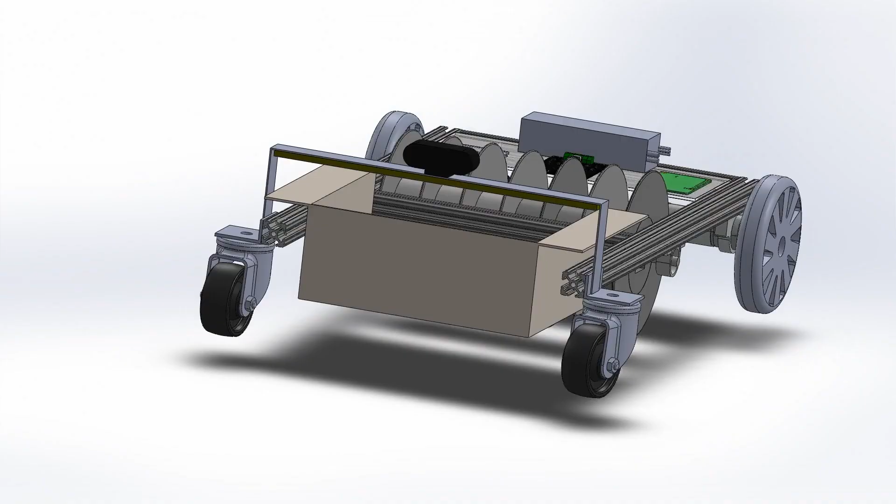What separates this engineering project from what one might accomplish in their garage is detailed CAD modeling and stress analysis. Despite mostly working remote from one another, we were able to collaborate and form well-defined CAD models using SOLIDWORKS. Through this program, we were able to illustrate our ideas to one another and ensure there would not be any unforeseen interferences. We kept updated models throughout the project and shared them with each other in order to expound our ideas.

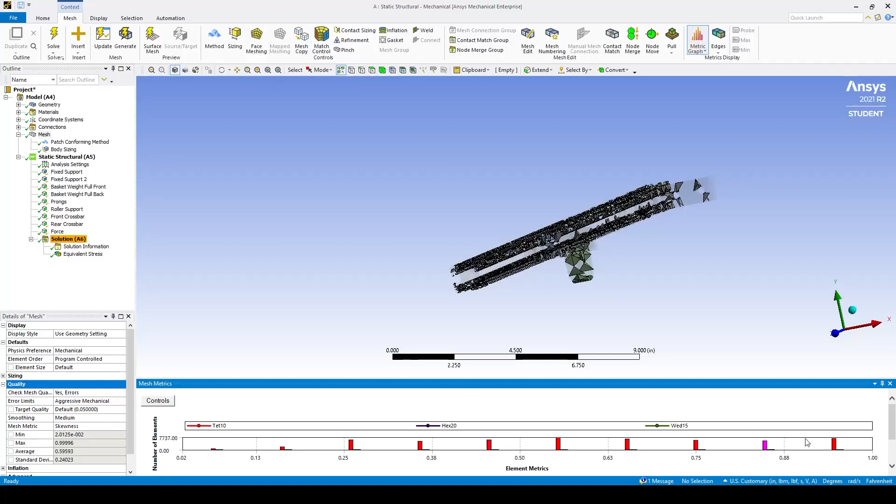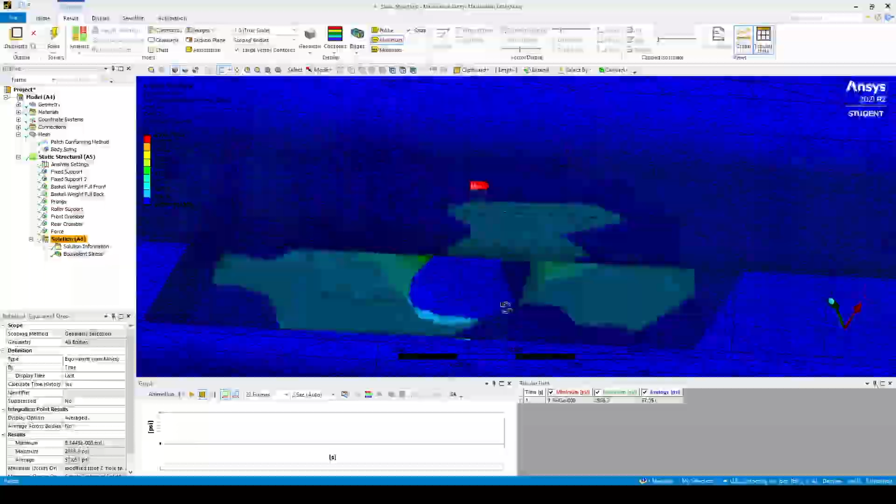Once we felt our CAD model was fully defined, stress analysis was done by creating simplified models and importing them into ANSYS. Unfortunately, our model was too complex for the student version, though this problem was overcome by creating simplified versions which were used just for stress analysis. Once the best trade-off was found through parametric analysis and mesh refinement, a worst-case stress scenario was examined by placing all of the weight on one side of the frame. Even under these conditions, our frame and fasteners passed the static structural test with a minimum factor of safety of 15.

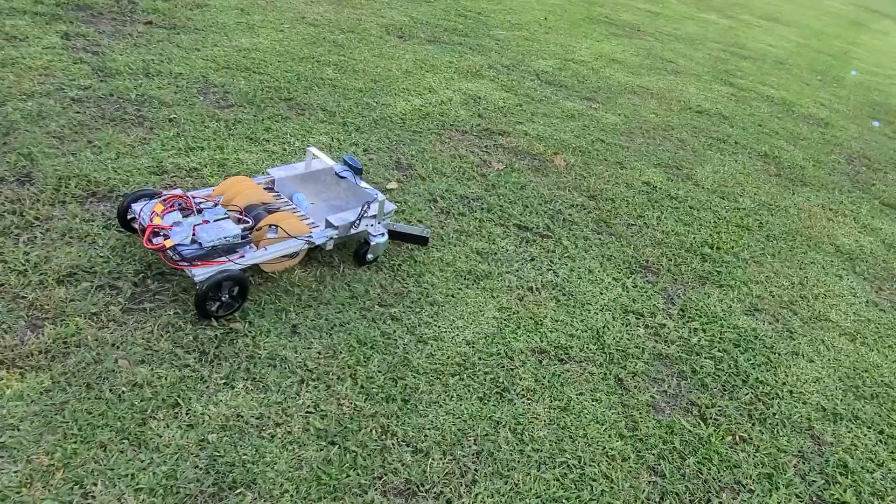Another aspect of the project I worked closely on was terrain traversal and the associated steering. We settled on wheels for terrain traversal as they were cheap, readily available, and easy to work with. Casters were chosen for the driven wheels as the rotation of the robot by the drive wheels would cause stress on the driven wheels if they were unable to rotate on a vertical axis. Differential steering was chosen as this was the simplest form of steering available and the easiest to implement and integrate with the controls.

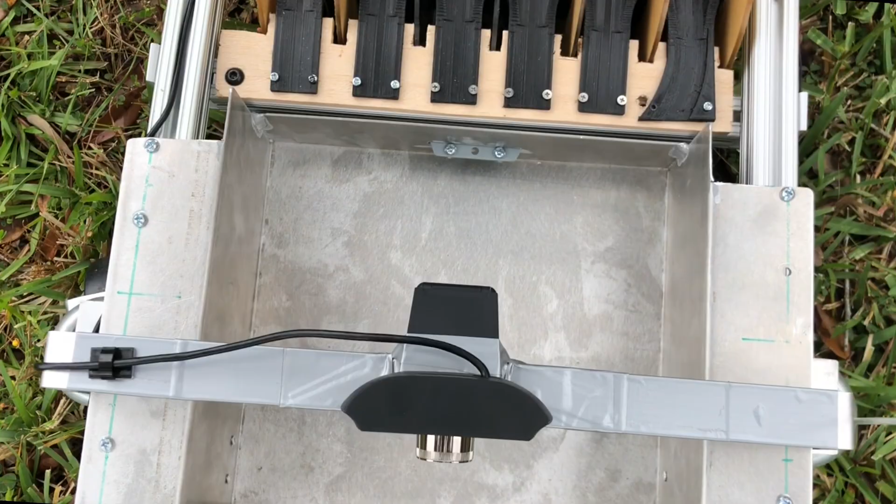Lastly, I worked closely on the cargo release system. The most effective method of release was settled on as dropping the basket containing the cargo, as this contains the least moving parts, as well as allows for easy operation by the user. Instead of collecting loose balls scattered on the floor, the user would just pick up the container off the ground. Our limitation in this respect was the release device available to us was flimsy and would be unable to support the weight of the cargo. We went through several iterations of design before settling on the device simply preventing the container from rolling off the front of the vehicle during normal operation, as this incurs the least possible stress on the release device.

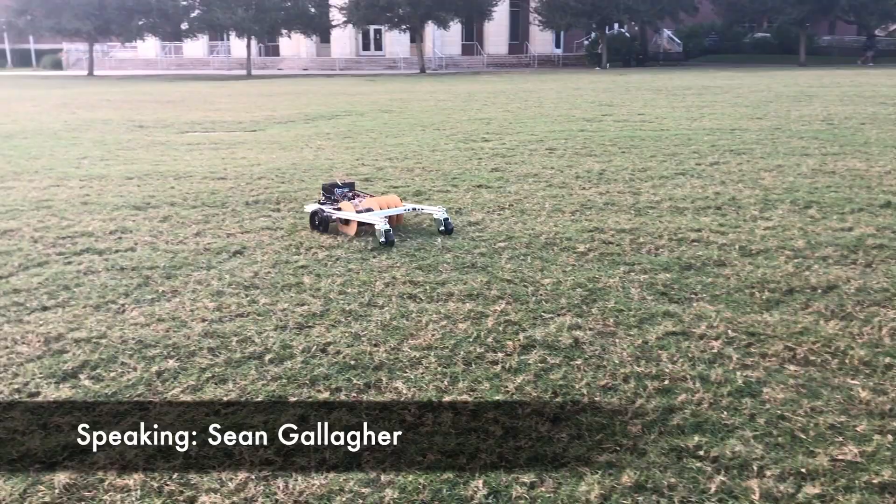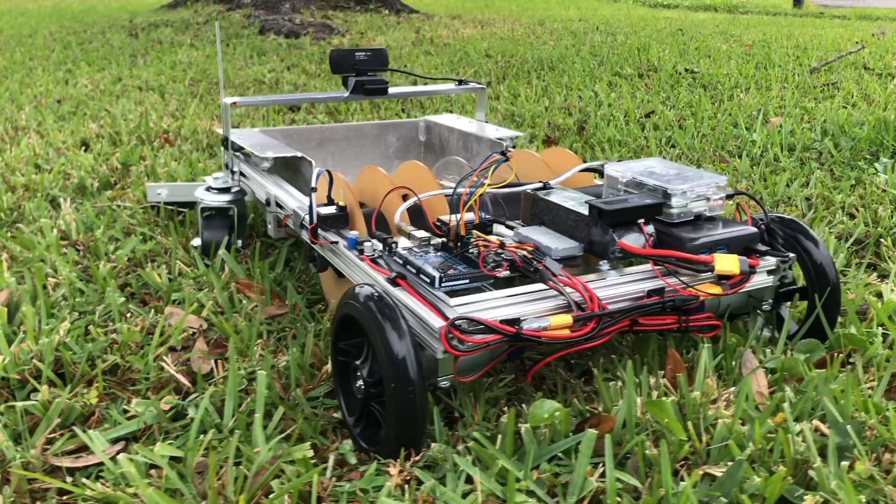The motors used are 12-volt DC brush motors with specs of 300 RPM and 233 ounce-inches of torque. This allowed a 20-pound vehicle to move at roughly 5 feet per second. The motors had an offset shaft that allowed for adjustable wheel height and also included Hall effect encoders. These motors were connected to a Cytron dual motor driver that used PWM input and MOSFET H bridges to control the speed and the direction. The motor driver had a max current limit of 10 amps for each channel.

A 12-volt 3S LiPo battery powered the motor driver and the payload release mechanism. The release mechanism needed a DC to DC buck-down converter to regulate the voltage down to 7 volts. The Raspberry Pi was powered by a 5-volt power bank, and the Arduino Mega was powered by a 9-volt battery. A power switch and battery percentage indicator was added for better usability.

The retrieval mechanism consisted of a laser-cut acrylic disc set that was spaced to capture the golf balls when it was rolled over. The spacer was 3D printed to ensure uniformity and allow for interlocking. The square profile of the disc axle ensured the entire mechanism would rotate as a unit.

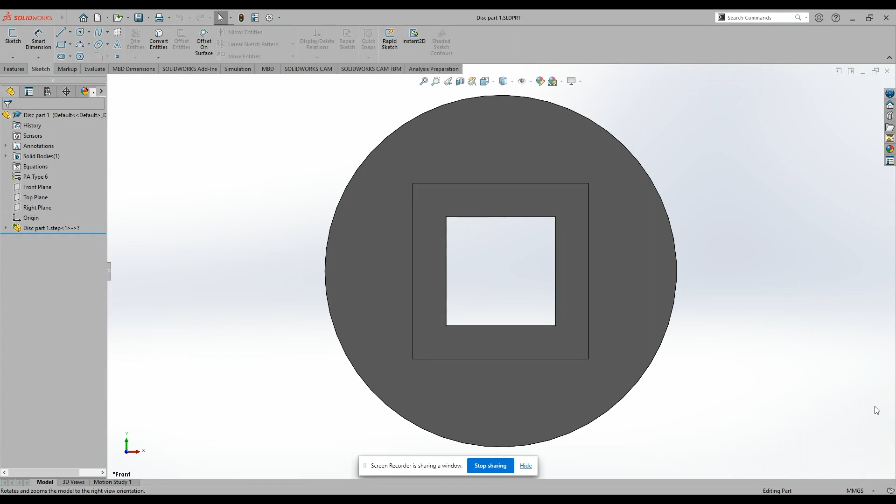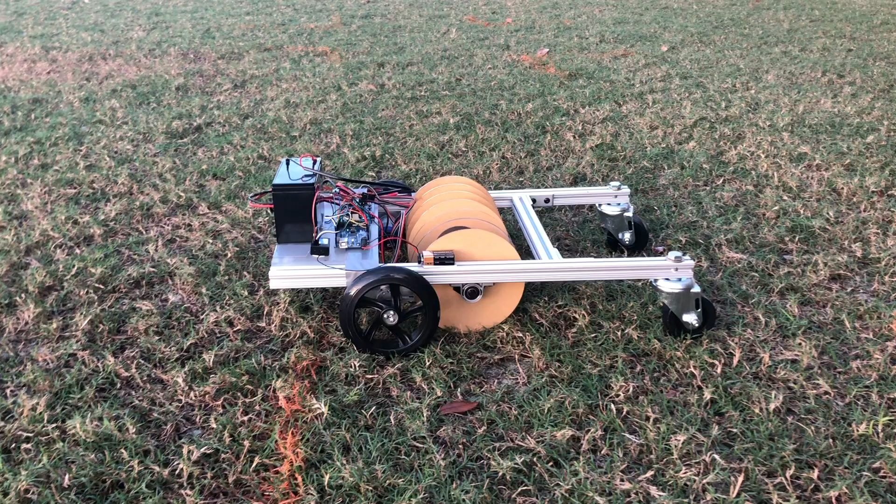This square axle was a challenge to connect to the circular pillow block bearings. An adapter was 3D printed to resolve this. The disc diameter was designed to be larger than the wheel diameter, which caused the disc to always be in contact with the ground. This eliminated the need for an additional motor to spin the roller.

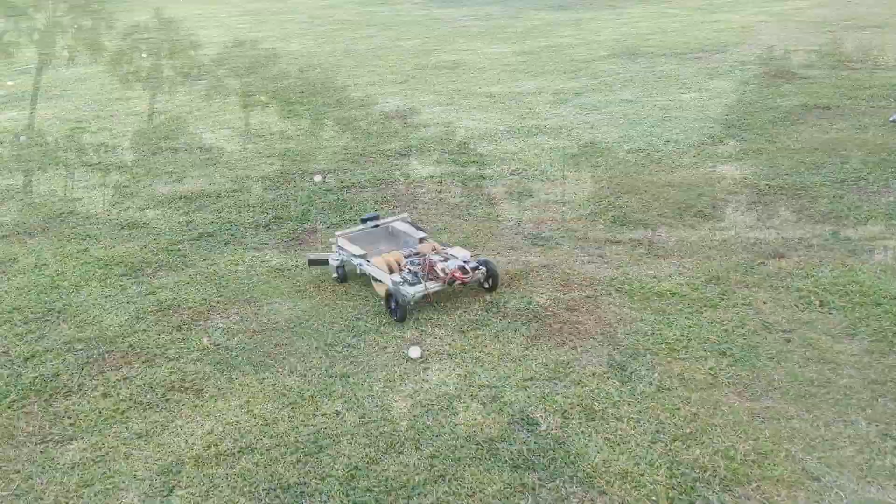Specially designed and 3D printed prongs were used to dislodge the collected balls into the container. If done again, the roller would be mounted on a suspension to allow balls in divots or ground depressions to be captured.

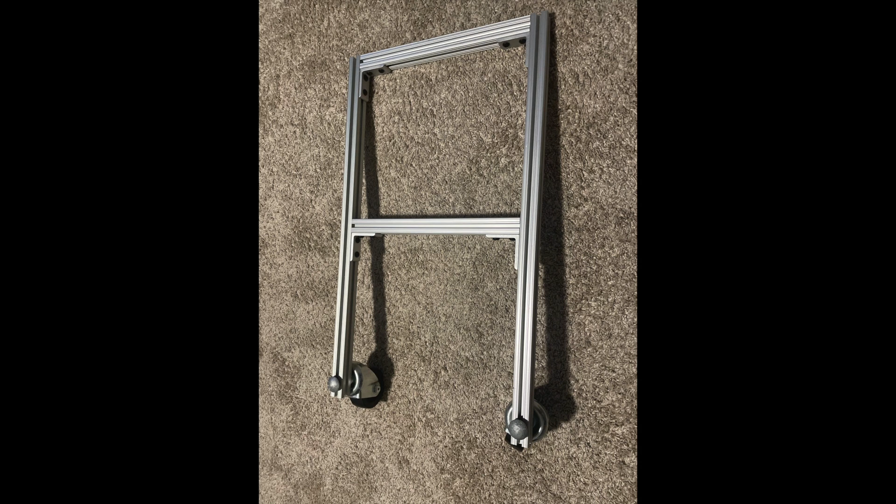In this first image, you can see the final product that we took to the competition. I was mainly tasked with the fabrication and the assembly of the frame of our vehicle. In the second image, you can see the initial design of the frame. Here it was assembled with T-slot and the initial caster mounts that we had. Here's another image of the caster mounted to the frame.

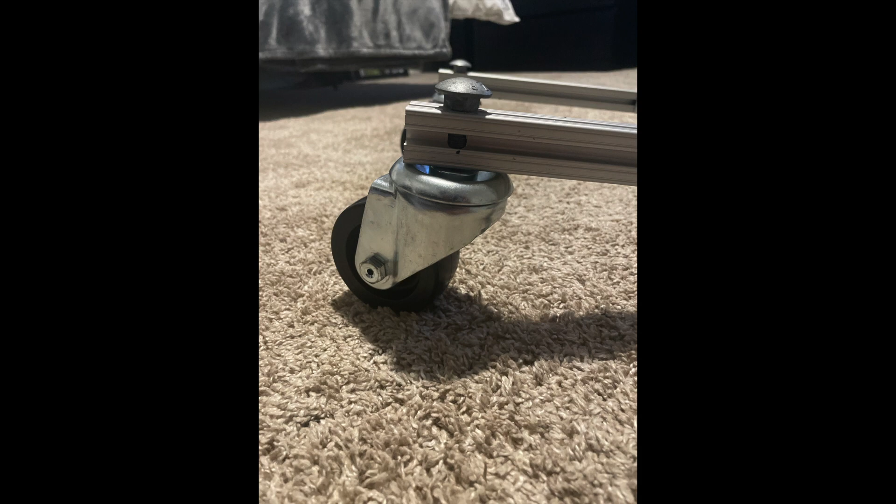One of the problems that we ran into: the motor mounts had a smaller hole diameter than the hardware that was provided with the T-slot. So I went ahead and drilled a 1/4-inch hole in the motor mount, which fit perfectly to allow our motor mounts to be mounted to the T-slot with the hardware that we had.

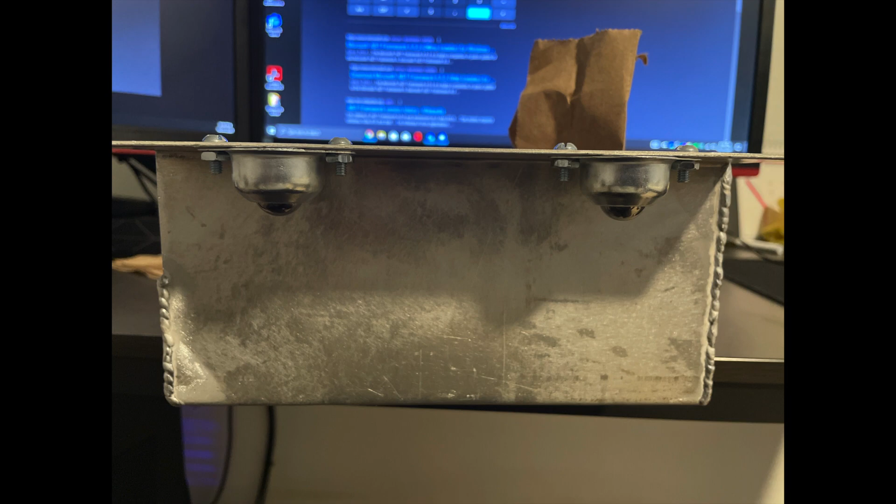In image 4, you can see the mounts for the bearings on the basket, which was our storage mechanism. These were mounted onto the basket. Now you can see the basket mounted onto the frame, and you can see how the casters are now on the side of the vehicle instead of parallel with the vehicle. This changed because once we installed the basket, we realized that we needed more room since the casters would swivel and it was hitting the basket. This was the final assembly for the frame.

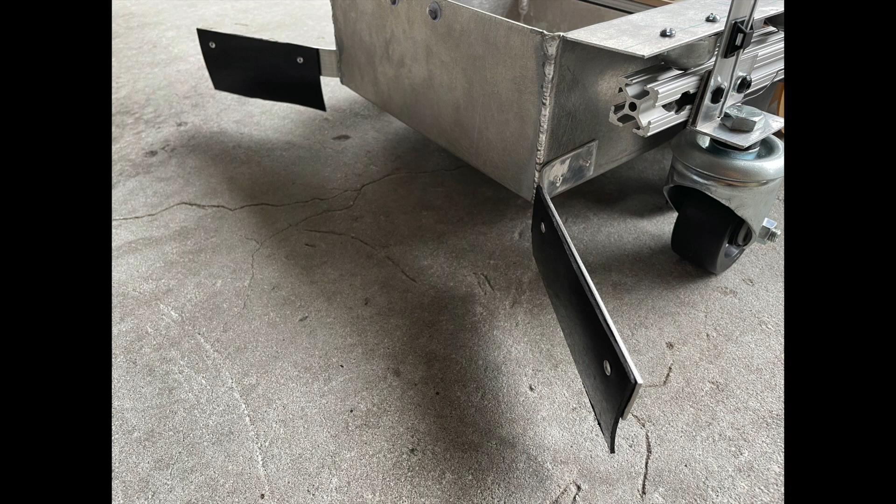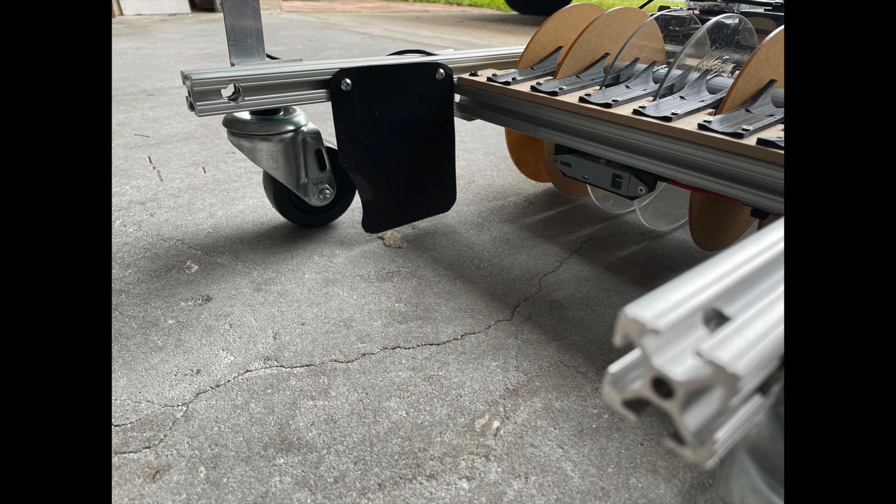In image 7, you can see that I added some front guides. We needed about 2 inches on each side. After adding the guides, we were getting a lot more balls, but we encountered a problem. Whenever the robot would approach a ball at an angle, the ball would slip right in between the caster and the pickup device, as you can see in this image. I added some side guides or walls to prevent that from happening. Instead, the balls would hit the guides and be directed to the pickup mechanism.

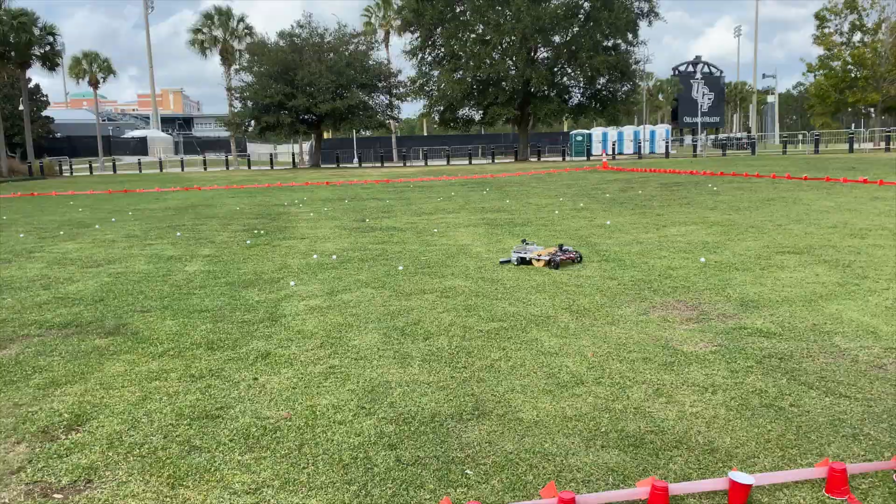One of the last things we did before the competition was cable management, and I did that together with Andrew, one of the CS students on the project. The last few things that we did on this were during the competition. The first problem we encountered, the rollers were too high and weren't rolling perfectly on the grass, so it was missing a few of the balls. So in the front casters, we lowered the vehicle to put more pressure on the rollers, so the pickup mechanism could pick them up more efficiently.

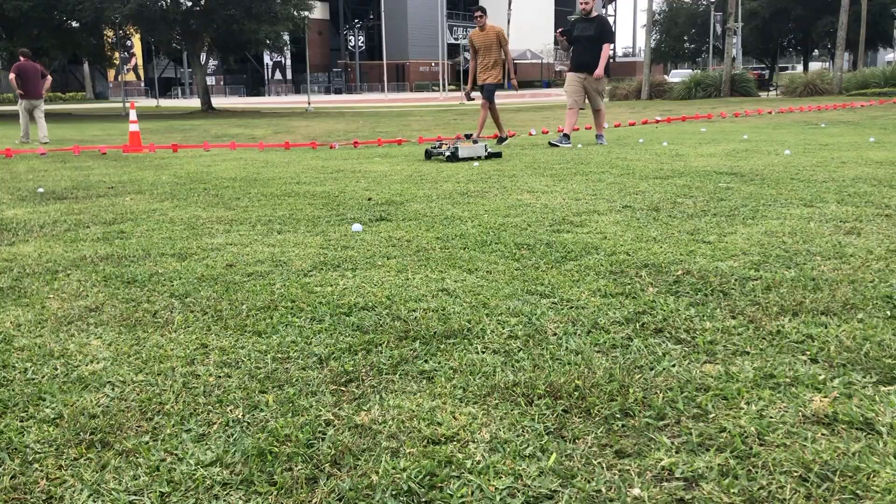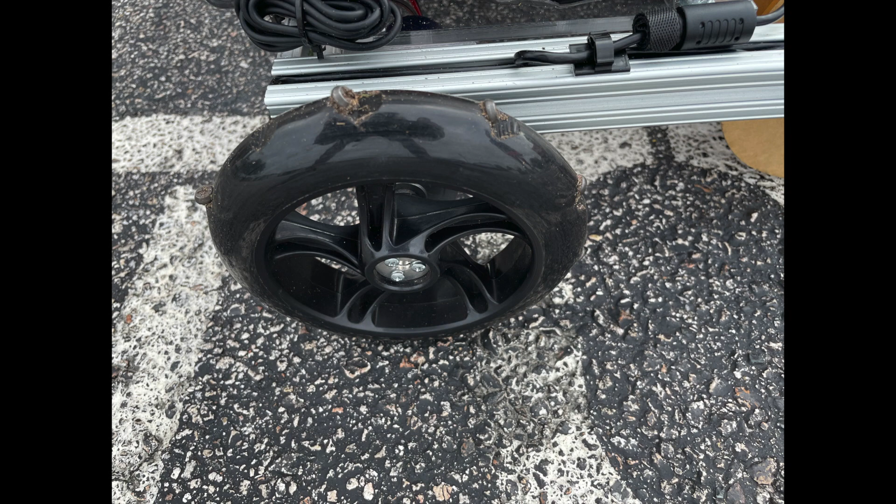The last adjustment that we made during the competition, which was actually for our last run, we were struggling a little bit with traction. So I installed some screws in the wheels, which really helped, as you can see the grass stuck in the screws. This helped our vehicle gain more traction, and in the last run we were able to pick up about 25 balls in 8 minutes.

To begin, for the golf ball detection and vision portion of our project, I used the Google Cloud Vision API to create a custom-trained machine learning model to detect golf balls. With the Google Cloud Vision API, I was able to generate a TensorFlow Lite object detection model, which is highly effective for our Raspberry Pi as it requires lower computational power to detect golf balls in comparison to a regular TensorFlow model.

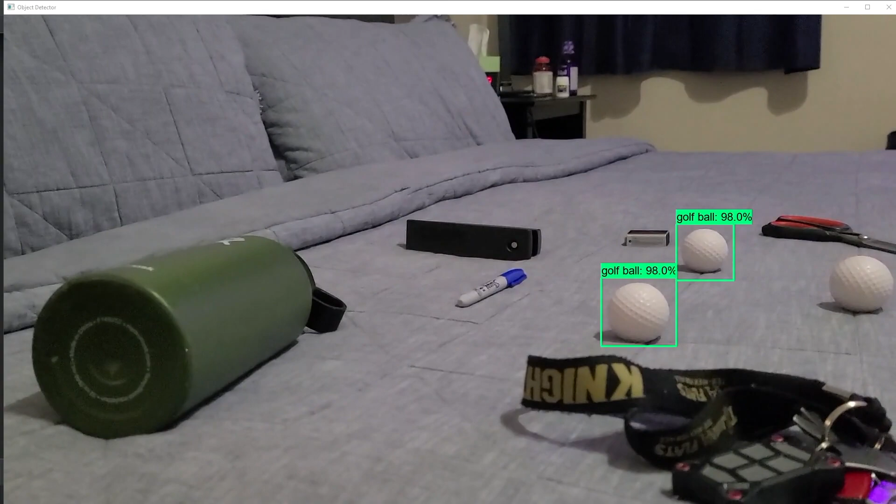Before training our TensorFlow Lite model, I also had to collect images and take pictures of golf balls in our competition field. In total, I was able to collect 609 images of golf balls that were on our competition field, as well as images taken from my home and from Google searches.

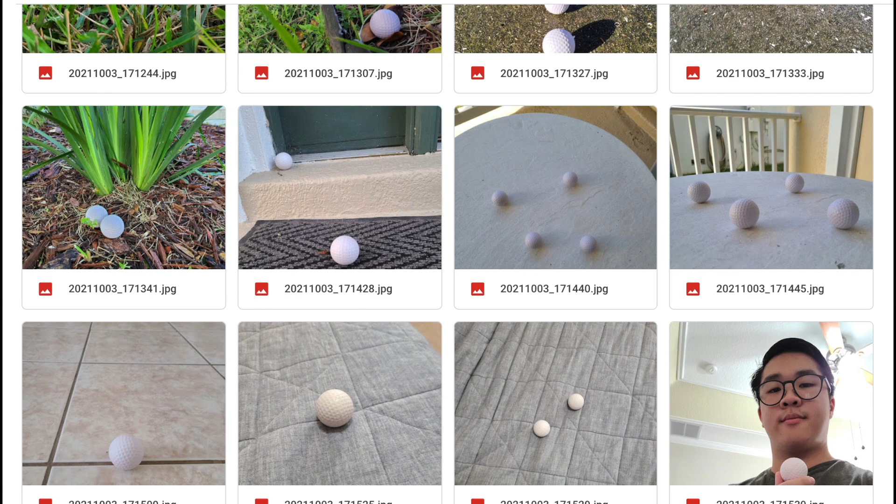Afterwards, I had to generate and label bounding boxes around the golf balls within my dataset. Google provided me with 20 compute hours, which allowed me to create a best trade-off model, as well as a model that sacrificed speed for accuracy, and vice versa. I was then able to quantize my TensorFlow Lite models, which is a process of reducing the memory requirements and computational cost of our neural network.

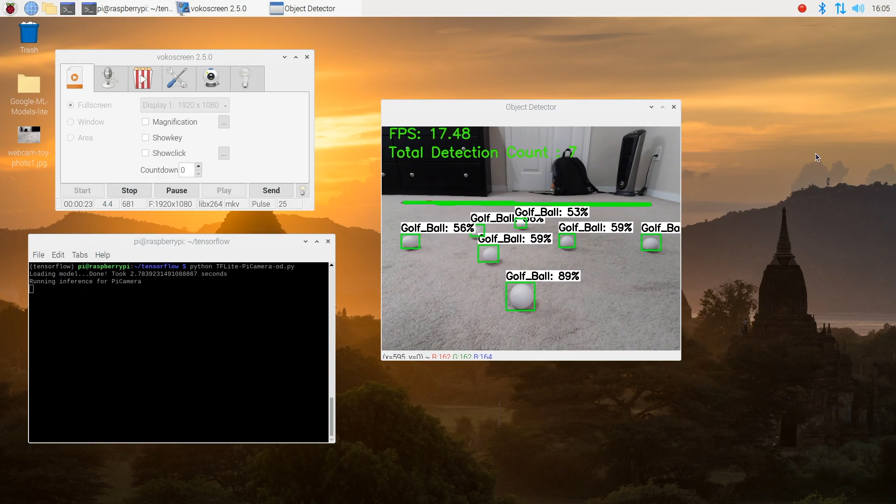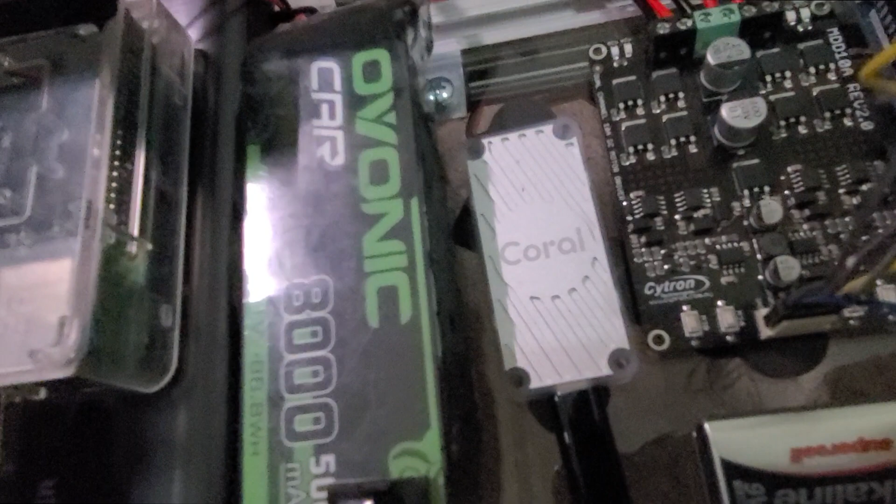This further allowed me to use the Google Coral USB Accelerator, which is a tensor processing unit specifically designed to outsource the computational power from our Raspberry Pi CPU to the accelerator. With these steps completed, I was able to run my object detection script in Python, and I was able to achieve approximately 18 frames per second with detecting golf balls on the quantized lower latency TensorFlow Lite model.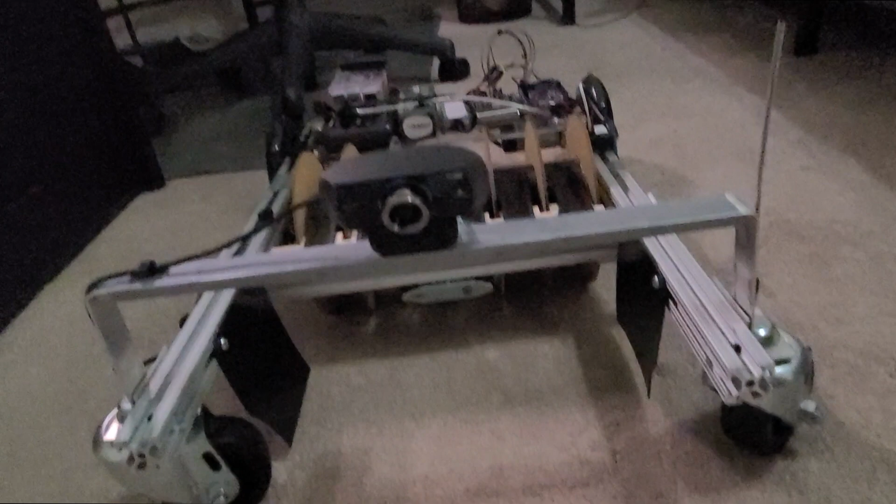As for boundary detection, our team decided that the color red would be our indicator for our robot to stop and reevaluate its surroundings so that it would not go out of bounds. With this task, I utilized Hough transformations, which is an algorithm designed to detect straight lines, as well as red detection on the HSV color space, which also creates a mask that will only highlight the color red. With these parts completed, I was able to provide our autonomous vehicle with the ability to find our golf balls and stay within the 75 feet by 75 feet boundary.

The original plan for navigation was to use a hybrid path plan that we developed to have our robot navigate in a square-shaped spiral for partial coverage of the field, and through the use of image detection, deviate off the path slightly to collect golf balls along the way, primarily using the ROS2 software library. I used Gazebo to simulate the results of my logic and navigation. I started by using the motor encoder information to determine the robot's location, and created goals on the field using an XY coordinate system to create the square-shaped spiral path.

I started with a full coverage path, which guaranteed complete ball collection, but also meant the robot would have to cover every square foot of the field. Due to the size and speed of the robot, this algorithm was very slow as a result. Once the vision aspect of our robot was developed and integrated in our simulation, I was able to remove some of the goals on the path plan to cover less of the field, and only navigate off the path if a golf ball was detected within range. This algorithm was much quicker but lessened the accuracy. At best, our robot would still miss at least 2 golf balls. This was mostly due to a blind spot in the robot's field of view when turning corners.

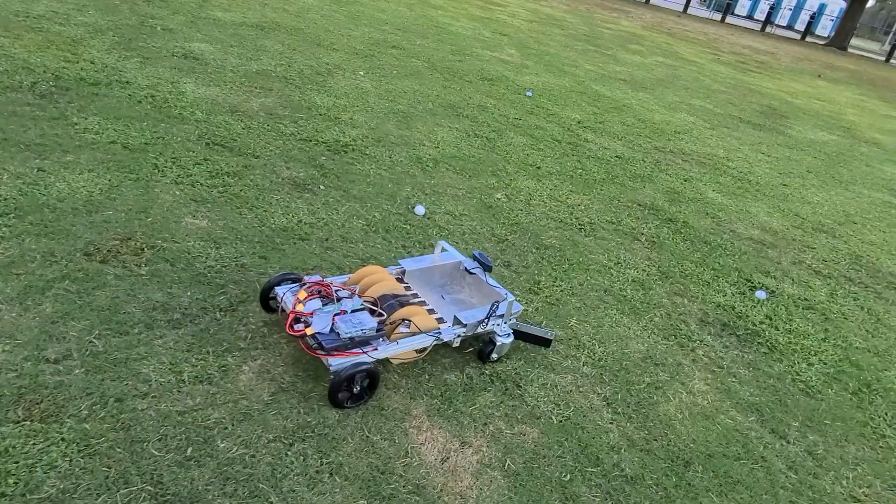Once we had the physical robot for integration, I ran into some other issues. The Raspberry Pi had trouble consistently receiving the motor encoder information from the Arduino Mega. Also, the kinematic formulas used to determine the robot's location had a larger than anticipated error due to slippage. This was increased even further due to our robot's traction issues. Also, our roller had trouble collecting balls in the field where the ground was not as flat, which was a problem since our path plan did not use any backtracking.

This led to the decision to change our path plan to random search. This is where the robot would travel to golf balls as detected or travel straight. As a result, red line border detection was necessary to stop our robot from going out of bounds. In simulation, this change went smoothly, and our robot was able to quickly and efficiently collect all the golf balls on the field. This algorithm did, however, require manual navigation to the drop-off location.

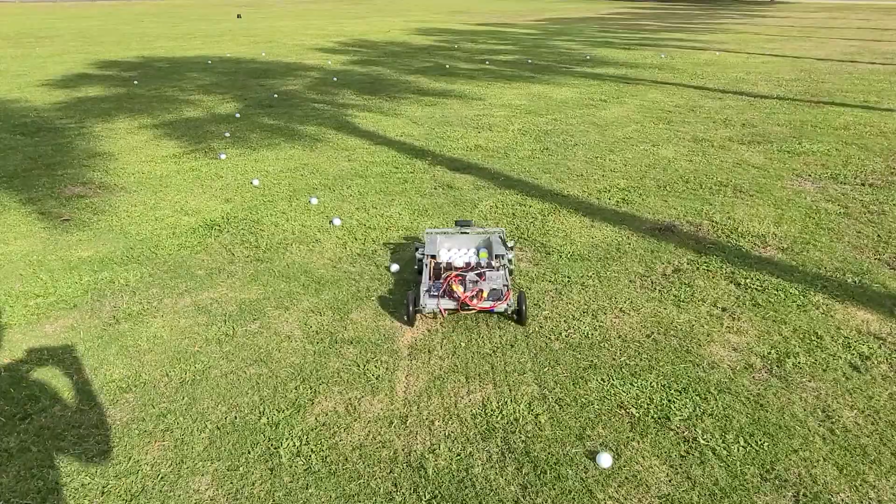When testing on the physical robot, we had a couple more issues that arose. Our processing power on the Raspberry Pi caused our image detection to have a slight delay and decrease in accuracy. In hindsight, the Jetson Nano might have been more compatible with ROS 2. Another issue with our image detection was impacted by the speed and bounce of our robot on the field. The faster our robot traveled increased the speed at which the image needed to be captured and processed to turn the robot for navigation. Even with these adversities, as a team, we decided to prioritize speed over accuracy and had great results. At peak during the competition, our robot was able to collect roughly 0.047 balls per second.